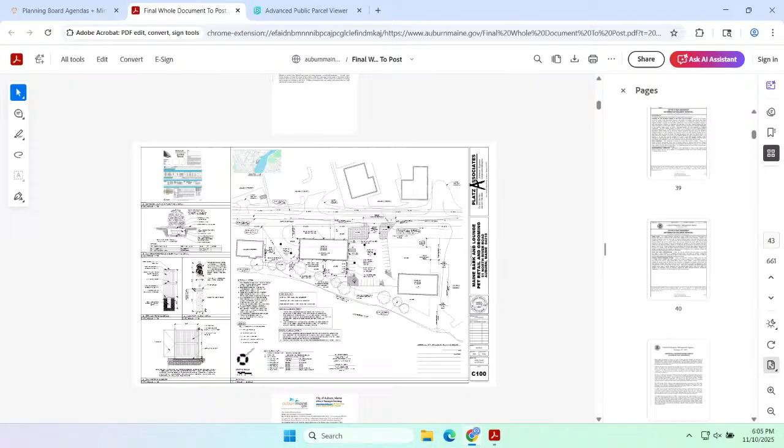That is it, other than there were some, again, staff was recommending the condition that the dog daycare portion of this is accessory to the primary grooming and retail business, with a total number of pets using the exercise areas, indoor and outdoor, at any given time not to exceed 20.

Travis Nadeau from Platz Associates, he's representing the applicant tonight, and I believe he has a few comments or questions for maybe you folks, and as well, if you can give him some input, but again, they're looking for this to be continued to the December meeting.

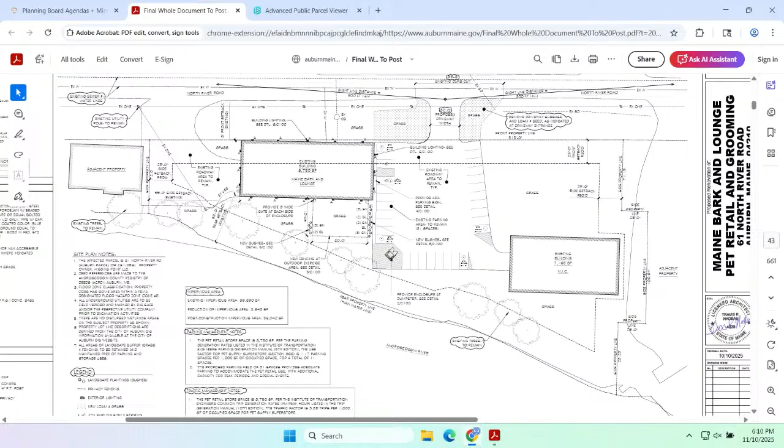Does the board have any questions for the applicant? I have questions, but I think they're more for staff. Okay, so staff, I hear we want a motion to continue, though we should probably still have a public hearing, correct? Correct. Yeah, I think so, that's what the applicant is requesting.

At this moment, I would seek a motion to open up public comment. So moved. Do you have a second? Seconded. All right, all those in favor? Excellent.

At this moment, if you would like to come forward to the podium, you can state your name, your address, and you have 5 minutes for any public comment.

All right, seeing none, I would seek a motion to close public comment. So moved. Do you have a second? Second. All right, all those in favor? Excellent, motion carries. Okay, questions for staff?

I heard no residential nearby. Can staff quantify how far this proposal is from the nearest residence? Maybe.

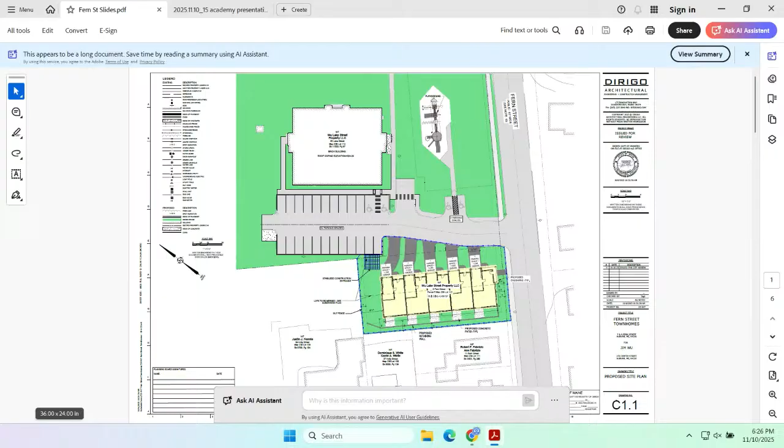This is the proposed subdivision plan at the intersection of Lake and Fern Street. The dark gray box is 7 and 9 Fern, which we're proposing to annex into the 80 Lake Street lot, to be one lot under common ownership. This also helps with sharing services, common areas for screened trash services and other things, and maintenance of the common driveway and sidewalks.

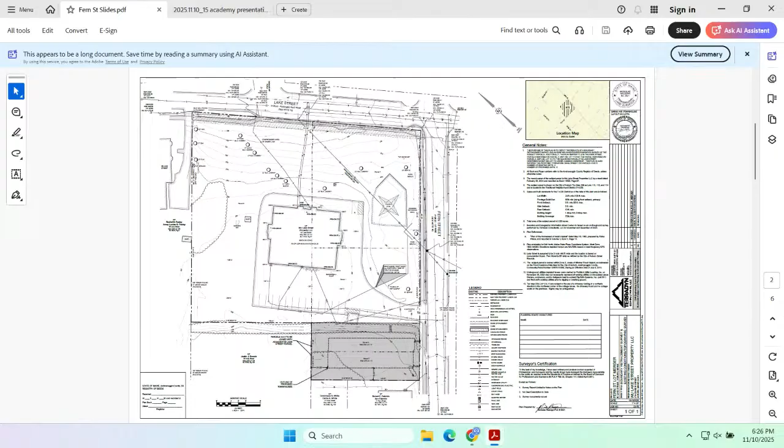For the utility plan, we collect the rainwater from the impervious area generated by the building itself, as well as most of the driveways and patio areas. That all comes to the rear of the building, farthest from Fern Street, into a focal point for filtration and stormwater quality and quantity control, at which point we propose to discharge it into the city stormwater system through Fern Street, through some new piping and structures. The utility corridor is pretty busy there through the patio area, but that's where we propose to bring in water, sewer, and electricity into the units.

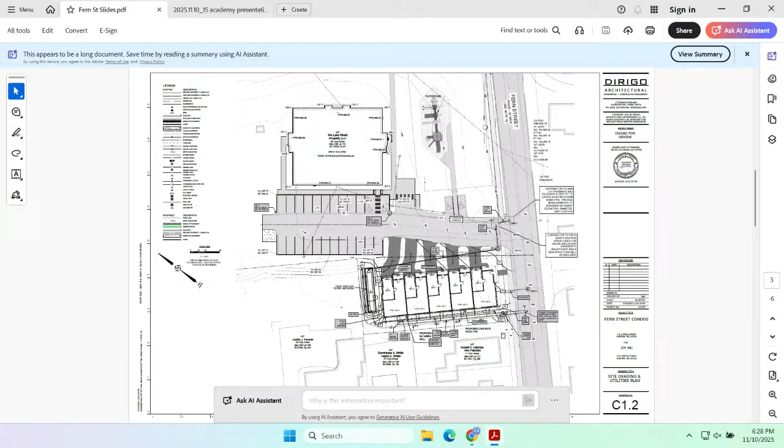These will be sprinkled units, so there'll be fire protection. Keeping the landscaping plan fairly simple, we do call for street trees to be replanted. There is one in the middle we'd really like to save if we can, though we're not sure if it's possible with the construction, but we propose to replant it.

Then just some common indigenous, low maintenance, nice looking shrubbery in different areas to maintain the buffer with our neighbors, so the development has a visual and a bit of an audible screen. Along the plan south of the building, at the bottom, that brown area, we proposed a mulched planting bed with a privacy fence atop a fairly short retaining wall that functions to help with the stormwater management.

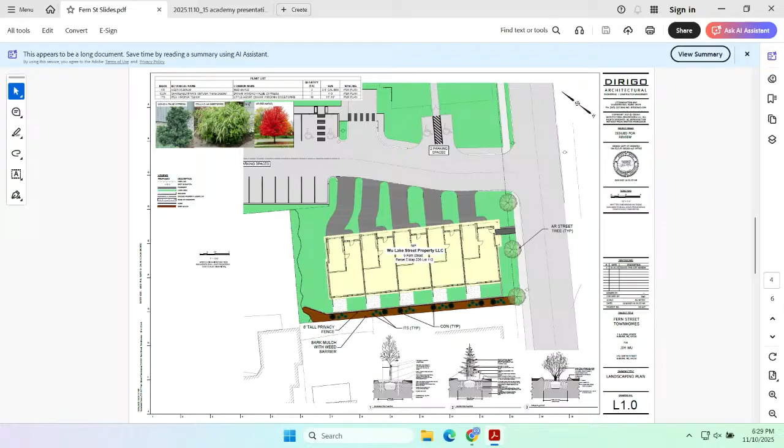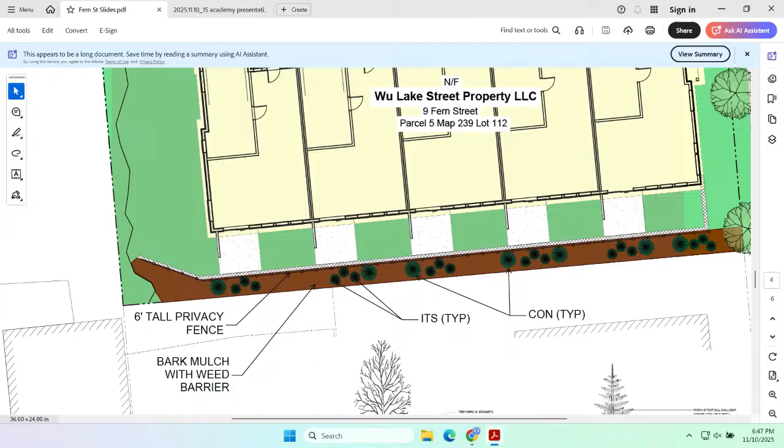I understood the Fern Street side, you actually moved the entrance right to the Fern Street side, so it looks like the front of a house, right? Yes.

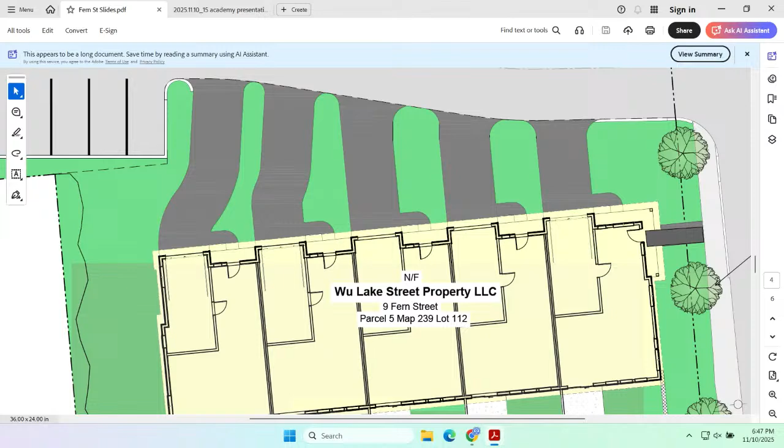There are several other, I don't know if several is the right word, but other rental properties in the area. There's not several, but there are other rented units.

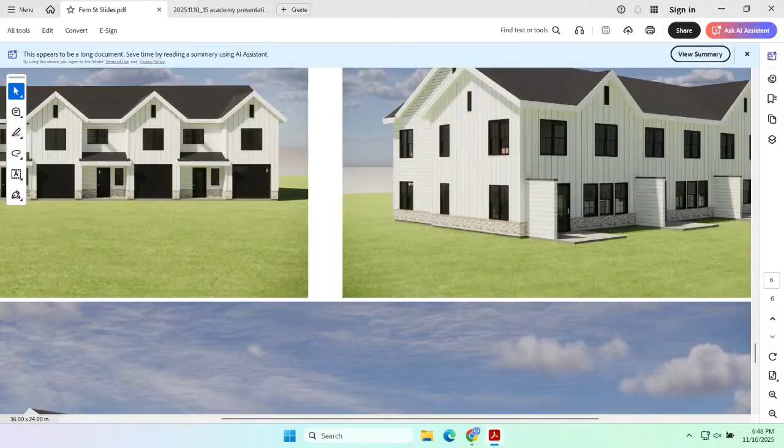And just to carry back, could we go to the rendering by chance? One more down if you would. So it's probably hard to see unless you zoom in, but because we wanted to preserve and fit into the neighborhood, there's upgraded finishes here. There's extra roof lines, there's board and batten siding with some stone trims around the bottom. So the effort here is, we could probably do the same building form square footage-wise that would meet the intents of the requirement, but that would not be nearly as architecturally appealing to look at.

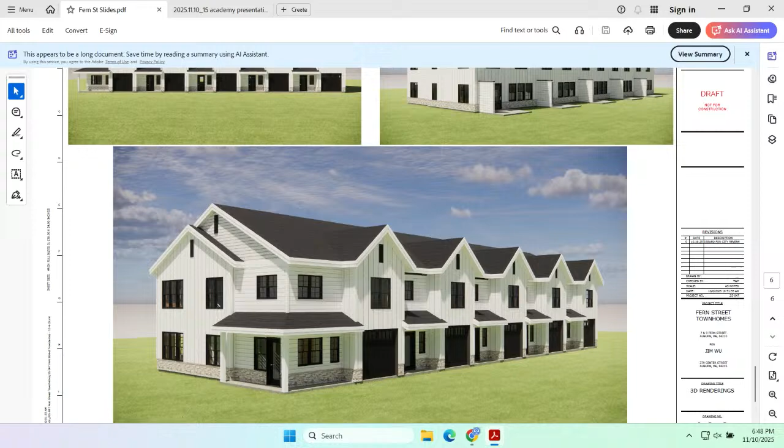The other thing I'd like to point out is we treated all 4 sides of this building, so it's not just the street frontage and then you've got the back of the house that's plain. From any angle, we strive to really make this a nice looking property an addition to the neighborhood.

David, does the ordinance require a developer in an instance like this to maintain the fence, to maintain the plantings, to replace plantings that die? And if so, is it a reasonable mechanism for the city to enforce?

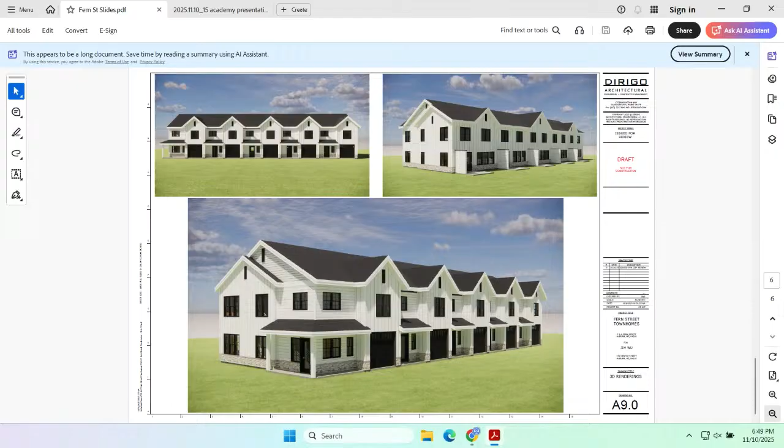If it's on an approved site plan, then they're expected to maintain and keep those improvements in place. If they are damaged, die, whatever the case is, we can take enforcement action then and say that it's no longer in compliance with what they got approved from the planning board.

You think that you can enforce that even though it's not a condition? Just simply because they show plantings on a plan, they have to do more than just plant them? I do. I think you folks are approving a specific plan that's in front of you that has a certain amount of improvements on it. No different than if this building isn't built the way it is, that's contrary to the planning board's approval. The retaining wall, the landscaping out there, they're getting approval specific from something that you guys approved. And that's all projects, not just this specific one. That's what I thought. Okay.

You're suggesting we have another proposal later this evening, and they've given us a rendering of what one of the 69 houses would look like? You're going to tell me they're all going to look like that? I think the applicant will tell you the majority out there will be designed to look like that. But to your point, Ed, they don't have to meet design requirements in that zoning district, so they could deviate if they wanted to. This district has specific form-based requirements that have to be met.

Thank you. Ed, they do address your question on page 6 of their proposal, where they will assume perpetual maintenance of private drives, utilities, landscaping, and stormwater facilities, as submitted in the draft declaration. The draft declaration was actually probably a carryover to the one that was going to be a condominium project, and it's not going to be that anymore. That doesn't matter, they're still obligated. Correct.

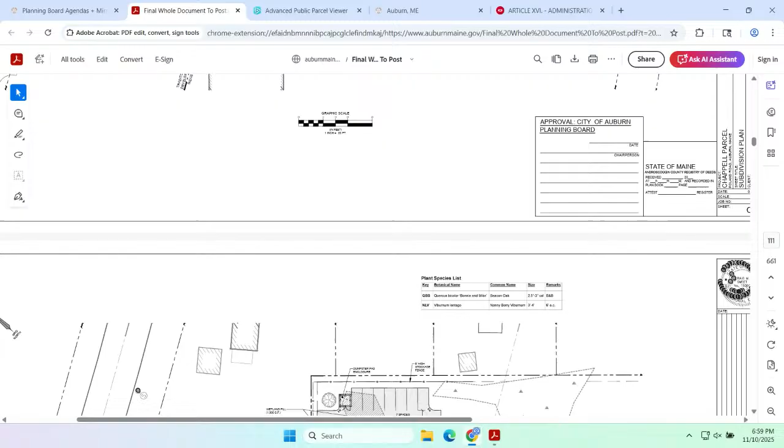Yeah. Show the. It's like 3 or 4 up. There you go.

And these were updated ones that were provided in the response to comments, kind of showing the frontage. So the stoops are going to all be facing towards the access drive to meet the intents of the T4.2 off the access drive as much as possible in that regard.

Backyard. We'll have back doors and the 6-foot fence in the back to help have some privacy from the neighbors as well. So, yeah, happy to answer any questions as well.

So regarding the drainage swales, that's a change from when we saw you the first time, correct? Because if I remember correctly, the public, overwhelming concern of the public was the pooling of snow melt and rainwater, and that will address it on your property.

Yeah, and it would address it on this property, and then if anything flows from the other properties towards the back, it'll all go that swale, and it wouldn't flow onto the parking lots from on this property as well. So it would, if anything drains off their sites, it would help drainage on their sites as well. So at the very least, your property won't affect others. Correct. At the very best, it may help others drain. Correct, yes.

Any other questions for the applicant? Are these all rental units? Yes, they're all going to be rentals. And the existing home there is currently a rental as well, which is being rented right now.

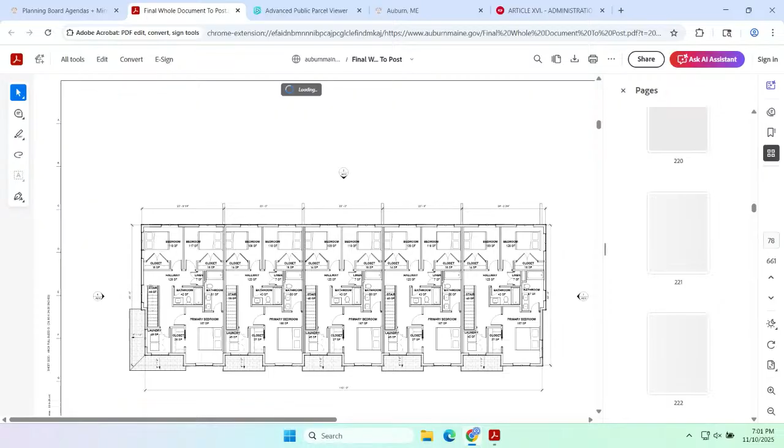Well, there's going to be sliding glass doors in the back with a little patio. It's going to be very similar to the front, just door, patio, and some windows on the second floor. But we only had the front.

All right. No, I was just looking for the, Oh, it's in the response. It's above that, yeah. I'm driving myself nuts right now. Right there. Yeah.

Can we assume that the rear is going to have the same roof line with the same pitches? Yeah.

I have another question. Is your client here? No, they're not here tonight.

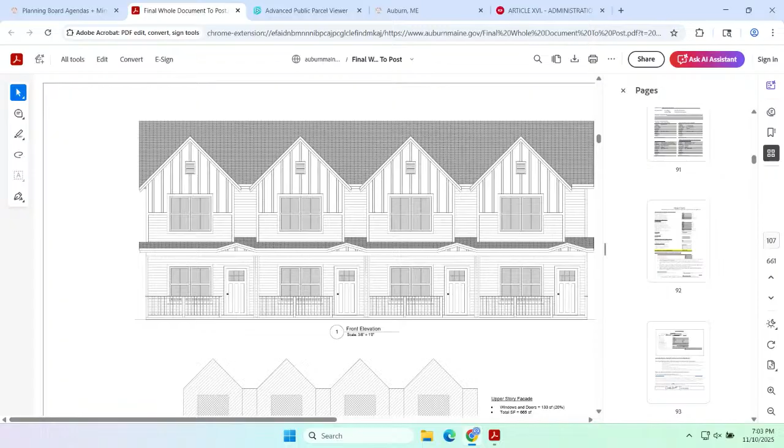So the evidence of financial capacity, which is a requirement under the subdivision ordinance, what we've been given is a letter that reads, 'This letter confirms that Jonah Chappell has a business banking relationship with Skowhegan Savings Bank that is in good standing.' That doesn't tell me anything at all. That could be $50 in a savings account. I mean, that's not evidence of financial capacity to carry out a project.

We also had from Kyle as well. I don't remember what the exact list says, but the one for Kyle says, 'This letter is provided to verify that Kyle Romick does business with Key Bank and is in good standing.' That's not evidence of financial capacity.

All right, any other questions for the applicant?

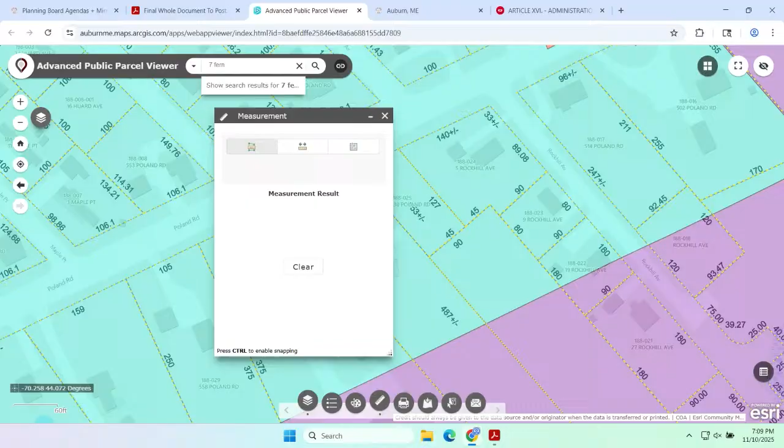You folks are at 5 Rock Hill, correct? Yeah, so let's try this. Folks need to remember the GIS is not a survey, it's the city's best guess. So based upon this, their garage may be 48 feet to the property line.

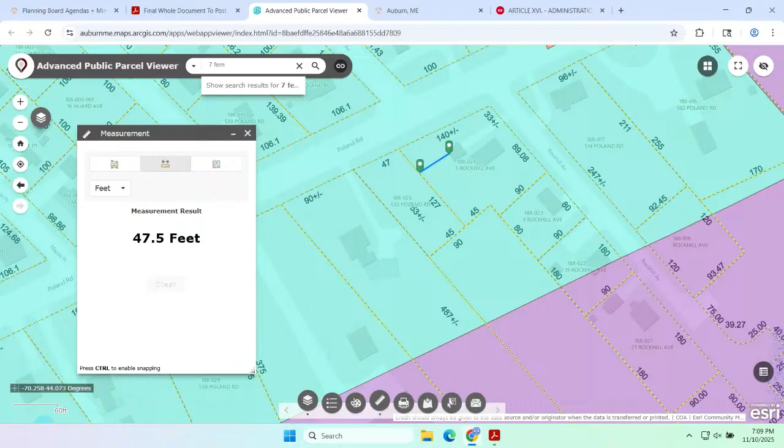And then as far as there was a question, Craig may need to speak to this more than I can, but I'll just point out on the plan here, the dashed line up there. I don't know if this works or not. That's a 5 foot setback. So if that's 5 feet, I'm guessing, I'm not sure, Craig.

Hey David, which side of the building is considered the front? For purposes of the Auburn Code, you can measure your setback off of where the shared access is. So this is the front, this is the front. We have a building. So the rear setback is a minimum of 10, and you said it was more than that, right?

Yes, but that's not a rear setback that I just pointed out. This is a side property line. So even though this is the front, not even sure. I would argue probably the rear is probably that way, all the way along the railroad tracks. I'm not sure if we have an image of that or not. And then the sides are only 5 feet setbacks, so whatever you want to call the side or the rear, by ordinance requirements. Thank you, Paul.

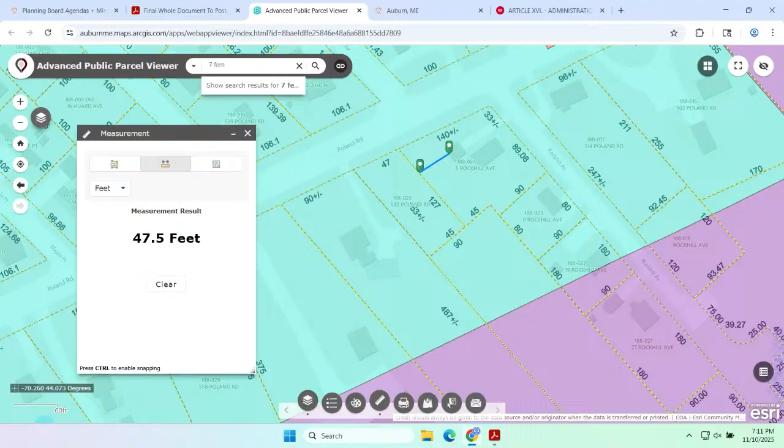I have, may I follow? So a couple of questions about the frontage of the lot proposed to be developed. You just had up the city's GIS, and I couldn't read it carefully, but it looked like it said 47 feet or so of frontage. It's both this lot and the lot next door. This is, you guys can't see that, can you? So a total of about 94 feet of frontage, not 5 feet.

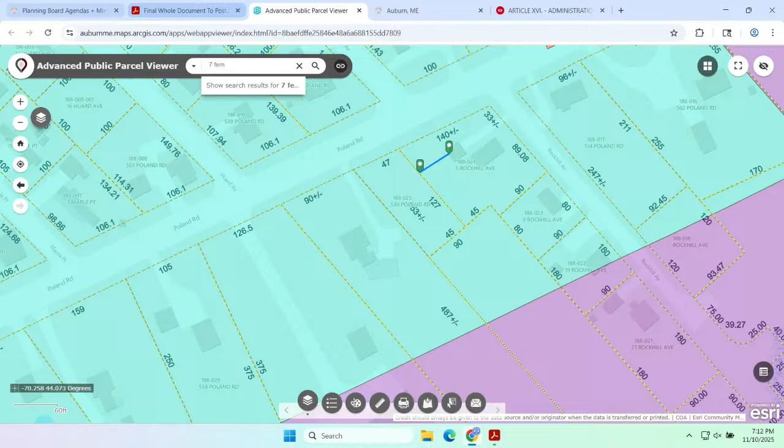Oh, I'm sorry, I can't see. Like 127 off that, I don't know the exact. Oh, okay. Why did you locate the dumpsters? And is there any other spot where they might be away from the abutter's home?

They're there because when you have the L-shaped parking lot, that becomes a dead zone, and it's straight back for where any truck would come in and out. And then the other side, the parking lot is much closer to the southerly property line, and there's swales we have running along the whole edge to collect the storm water. So that zone became, in terms of site navigation and the layout of this site internally, the optimal spot. And it has the full enclosure, and then there's an 8-foot fence around it, and we even put a tree next to it to try and shield it a little bit additional from the neighbor on that side.

So it's got fencing immediately around it, and then a standard tree and an 8-foot fence behind it, I believe it's 7 foot around the dumpster, but I'd have to confirm, it's 6 or 7 foot around the dumpster, the standard, and then 8-foot fence around the property line, and then a tree adjacent to it. Like chain link with vinyl slats kind of thing? I think it's wood, but I don't remember off the top of my head, it's going to be a privacy fence for both of them.

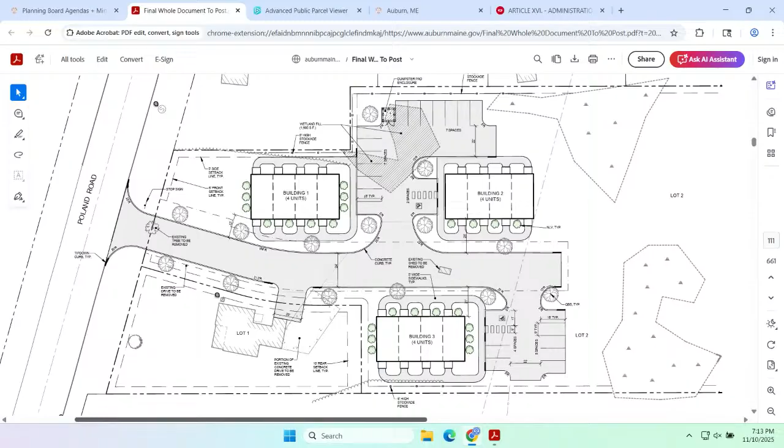Where do you intend to store snow on the property? So snow can be pushed straight back on the road because the swale kind of starts. The snow can be stored along, straight back, and if it's in the swale, or right in front of the swale - you don't want it in the swale, but it'll help drain back that way - and then the whole site's gonna be pitched towards that swale. So at the end of the parking lot there, and then adjacent to building 2 would be a good spot next to the swale, so as it drains, it just goes right into the swale.

And then the access drive will be curbed all the way back, so you can't just come in, you wouldn't want to trip up your curbs, so they're going to want to push it towards the end where it's not curbed. Maybe explain to me again, I'm looking at the swales, but the dumpster, why is it not all the way back, almost right towards the swale where the truck could come straight in? Still have room to, I'm not sure I'm following the question. Are you talking about right here? Nope, come straight in the drive itself, straight towards the two swales coming together. Oh, at the end of the access drive? Yep.

All right, any other questions, comments? Question. Are the plans for the swale in the plans that you provided with us?

They're just detailed on the grading plan there. So those would be the contours of the swale. It's a 1.5 to 2 foot deep swale. Some areas as it gets towards the back, it gets about 3 feet deep, 2.5 as it gets towards the back, and the grades change a little bit because you have to get down to the lower half where I think it's a 5 foot drop from there to the level spreader.

Going back to the original plan that came to the planning department first, and then you had some thoughts of changing the plan. You requested more time to work with it. I guess as I look at it, was it just an economic issue, you needed more units to make the project viable?

No, they just decided to move away from the lots aspect of it, and felt that this would be a good add into the site in the area. Since it's tucked back off of Poland Road, it would be kind of its own little community there. But trying to get that third building in, it's made it more crowded. If I remember correctly, the building location in the front there is very similar to the property lines as it was before.

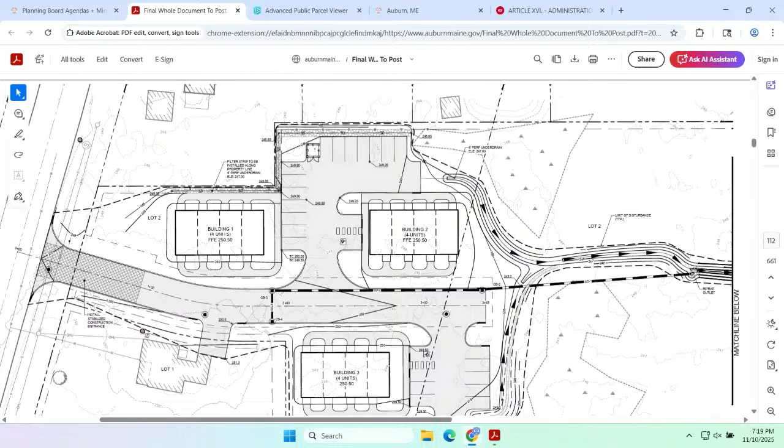All right, any other questions, comments? Seeing none, I would entertain a motion. I need to be aware of how I word this. I make a motion that the proposal does not meet our requirements, citing page 4 of our development review checklist, specifically technical and financial capacity. I'm not convinced, given the letters of information from KeyBank and Skowhegan Savings, that the applicants have the financial ability, as these letters are written, to carry through the project.

Do I have a second? Second. All right, do you have any discussion of the motion? If the board's interested, I would maybe look towards the applicant here, versus denying it. I'm wondering if there's a condition and/or you continue it to give the applicant the opportunity to come back with sufficient evidence of financial capacity.

That seems more reasonable than not approving it. If they're able to do that, and not approving it, they would have to actually resubmit the whole application and go through the whole process again. I'll amend my motion to include that it be postponed until they can provide adequate financial information.

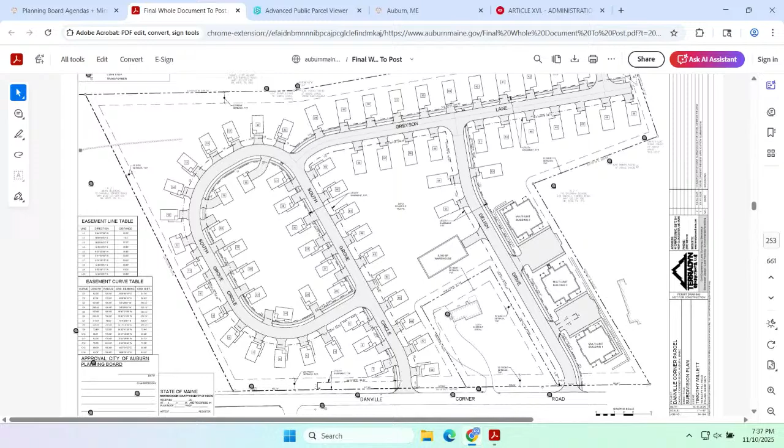Let me ask about the plan C2.1, grading and drainage. So with respect to that particular plan, I'm having a little trouble looking at Unit 14. It looks like - are you planning to add a lot of fill in those areas where the building site seems to straddle or go deeply into what appears to be a pretty steep ravine? There'll be a little bit of fill on 14, and along the curve, yes.

It'll take me a while. I have a question in the meantime. I'm looking at the land lease, section 15, termination of lease. It seems to give the landlord pretty broad termination rights. These are stick-built homes that are being purchased, and the landlord terminates for failure to pay ground rent - what is the homeowner supposed to do with their stick-built house that is no longer allowed to occupy the land? I will have to mark that down and have the attorney answer that one for you.

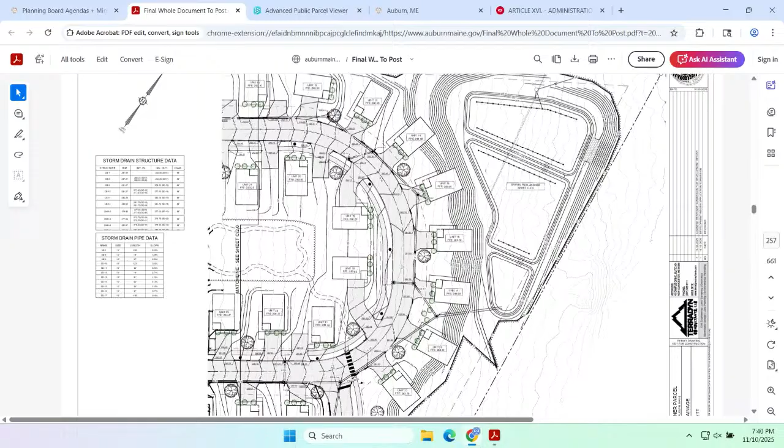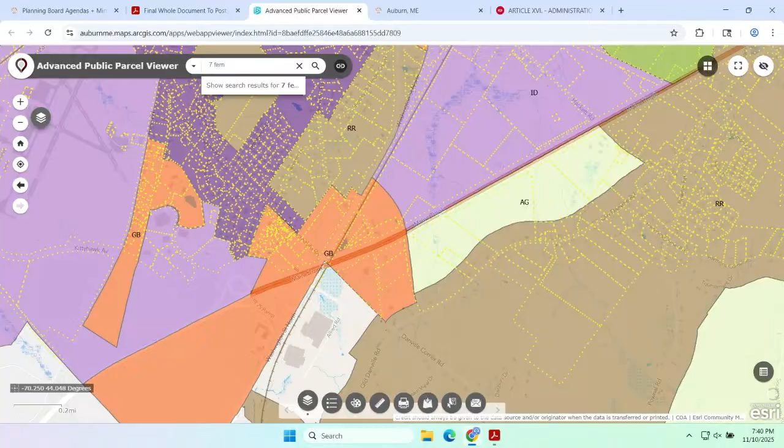I guess it would be helpful for me to see an aerial view of this parcel, at least of the two parcels, in relation to Washington Street and to the lighting project that's a state project upcoming next year. To which project, Bob, are you talking about next year? This is just above the blinking lights now. Oh, you're talking about the traffic signal? Okay, yeah, sorry.

Washington Street's where? Okay, where's the light? So how much - what's the footage? What's the distance between that light and the three driveways? I don't know that distance off the top of my head.

Close to half a mile. A little less.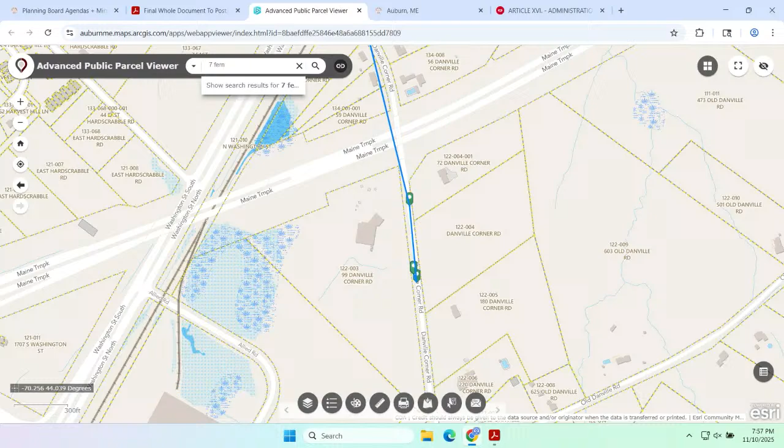So with traffic concerns, of course, if you're going into Auburn, going straight to Washington Street makes the most sense. Is there another way out that people would reasonably use?

It's probably a better question for some of the folks in the audience. I have a pretty good idea, but especially if you're going to Portland, making a left turn is difficult, so you might go the back way to come out in front of the Mobil gas station further down, but most people won't do that.

And I guess what I would say, and not to cut you off Paul, but I know that part of staff's recommendation is a traffic impact analysis. So I think we could sit here and surmise potentially from our own anecdotal experiences, but I would rather prefer to have an expert weigh in on it.

Sorry. I guess as a quick reaction, maybe a knee-jerk reaction, if we are to look at the site plan review under section 60-1277 and section 60-1359, even to accept this as the preliminary review, personally I can't find that this application meets the requirements of those 2 sections.

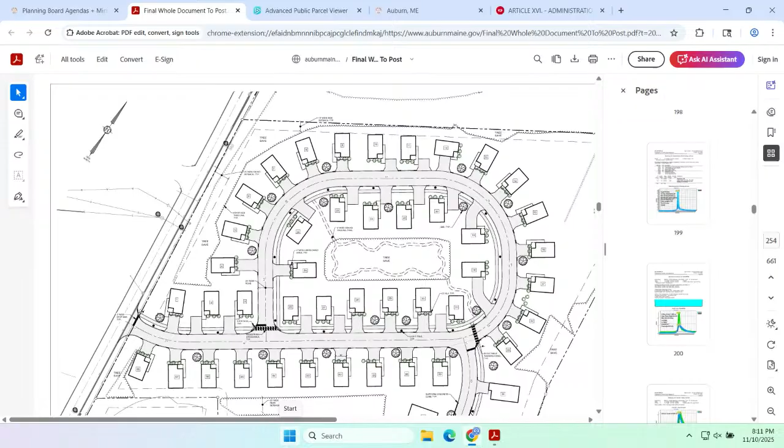May I ask a question of staff, a procedural question? The suggestion in the staff memo is that we would grant preliminary approval and then have another hearing, the question being whether it would be a public hearing for final or review, but there's nothing that would prevent us from continuing this preliminary review. Not at all, not at all.

Would you feel comfortable continuing this preliminary review after you received a traffic study? Okay, that's reasonable.

So what I'm hearing, kind of formulating as a motion, is continuing with a traffic study. We're going to have the attorney here next time as well. He wasn't able to come for health reasons but he'll be here next time. So front and center is that agreement - I'll relay all the questions you guys had back to the applicant for that. Maybe providing another draft that reads a little bit better would be helpful. I'll try and get that from them.

I already talked with the city engineer about the traffic study, so we're already working on that. Do you have a question, Bob? I guess I'd just add to the traffic study, to be sure we have some communication with the state in writing, that they recognize this project and it should be reviewed along with all the other comments that have come in within the deadline, but to make sure we get some communication back directly from the state with respect to the traffic situation at that particular intersection.

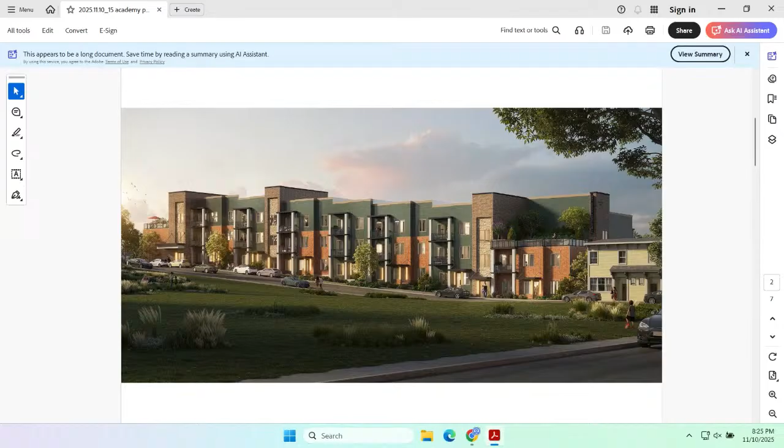Just going to give you a brief presentation on the 53-unit market rate apartment building proposed at 15 Academy Street. David did a good job of just kind of covering broad strokes the site scope and a number of items that we've been coordinating with staff on.

Just wanted to note, really appreciated the coordination with staff. As was noted in the planner's memo, we had, I think, 4 waivers in our original application. Gotten that now down to 1 with just a few tweaks to the site, so certainly helpful in that respect.

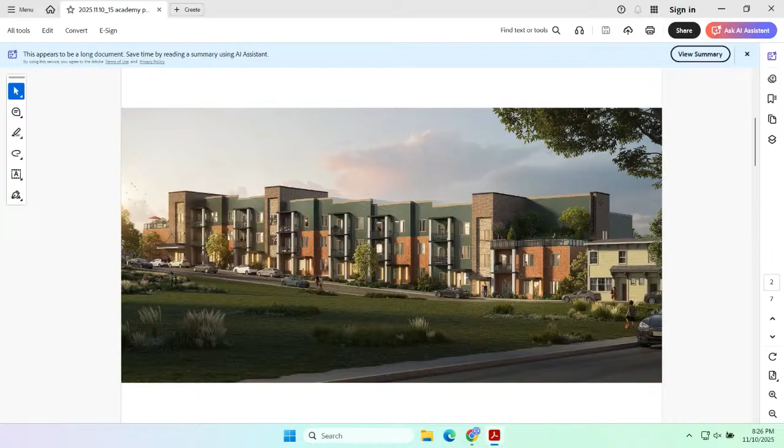On the first slide that you'll see here is a view of the apartment building looking northwest, and in this view you would actually be standing on Main Street. In the next slide I'll show you just for orientation again, if you don't mind, David.

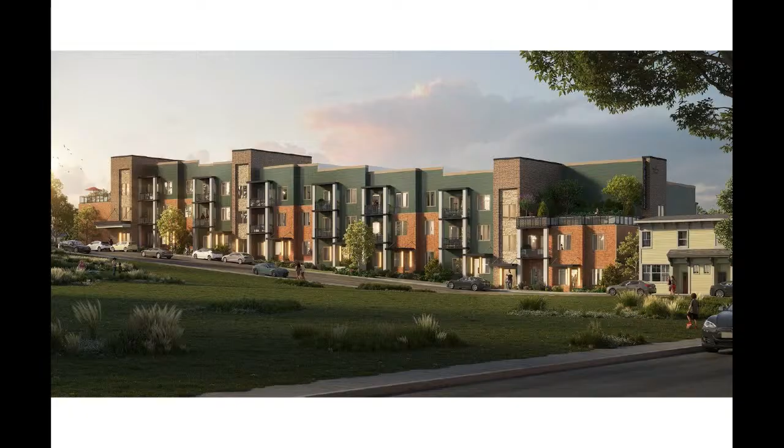So, if you go back to that rendering. I just wanted to touch on this, and we can bring it back up when we get into discussion, but I'll preface it with there's certainly been a lot of time gone into this project here. A lot of thought gone into it. The applicant team here, we're certainly really excited about this project and to get some feedback from you folks this evening.

But going into the form-based code items here, we're certainly trying to build on the street wall presence here. You can actually see on the very right-hand side that shows the existing townhouses that start at the intersection of Main Street and Academy Street. So really trying to pick up where they left off and bring that street wall up Academy Street here.

We think it's a great location with the park across the street, CLT across the street, in this downtown urban environment. So a lot of access to local businesses there as well. Great access back to the adjacent infrastructure for roadways, everything like that.

There's certainly a lot of grade across this site, as you'll kind of see on my not so descriptive black and white plans, but this rendering really does it justice. As was noted, there's 8 steps in the building right now.

So I think what goes into and becomes kind of a complexity with our design actually became one of the most unique features of the design. So I think this is a really good looking building in that respect.

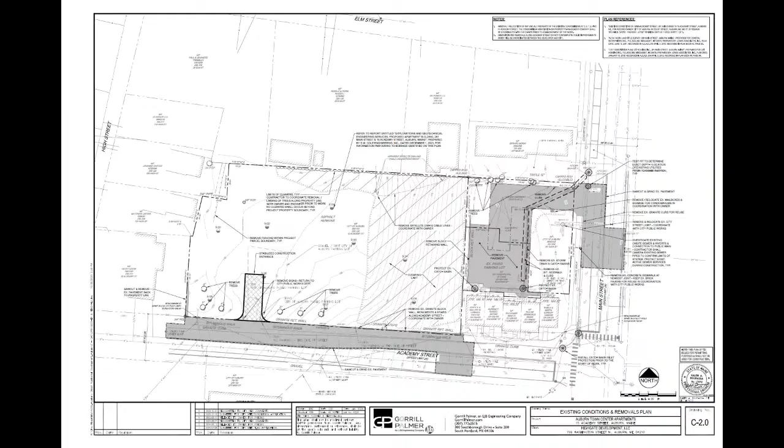These two lots are historically developed, currently vacant, we'll call them. The Main Street parcel is actually the primary access for the existing condominiums, so that's a paved curb cut with some utilities running through it as well. The upper area is more or less a gravel lot at this point. I understand that the CLT, when they have events, we allow them access to park there now.

So if you go to the next slide.

We have individual ground floor access with stoops, going along with the form-based code as well. Additionally, on the back side, there are stoops to those ground level units. There are internal stair towers for other folks that live on the upper levels to access as well.

Sidewalks going around the building, connecting to the Academy Street frontage, and additionally to Main Street. So we like that we're generally on the corner of Main Street and Academy Street, very close to downtown. You have the parks, the river close by. A lot of access for tenants to get in and out via foot traffic as well. So we think it'd be a great addition in that respect.

As I mentioned before, generally the same location for the curb cut on Main Street, actually slightly shifted south here, but we're setting up a lower parking area which includes the spaces that would be relocated or reestablished for the existing condominiums. Of course, we're maintaining utilities for those folks, and currently working with them and CMP to relocate their existing electrical services underground, to try and get rid of the overhead wires along Academy Street, or at least along our frontage.

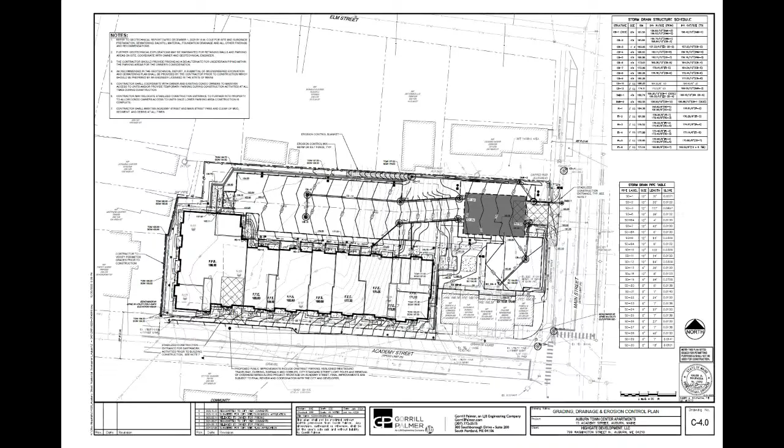I don't think I had any additional slides, I just wanted to touch on a couple other items. I know David had forwarded a comment from the abutter, I believe it's Plan West, the direct abutter there. As mentioned, we have a fence, called out as a 6-foot white PVC fence there. I wish I had included it, we might be able to pull it up with our packet. We have 3 lilac trees along that edge of the property to help with views and buffering for the folks next door. There's additional landscaping throughout the site, so if other folks have comments, we could pull up that plan and point it out.

Just on the parking item, that was something we had talked about previously with David. We're providing 58 spaces on site, which essentially meets the requirement for the actual tenant spaces. I wanted to make the distinction that although 73 spaces are technically required, the difference is really in what's required by code for guest spaces. We're certainly motivated, and the applicant has already started reaching out to CLT and a couple other local off-street sites for parking. We'll hopefully have more feedback for you on how those discussions are going and whether those can be secured.

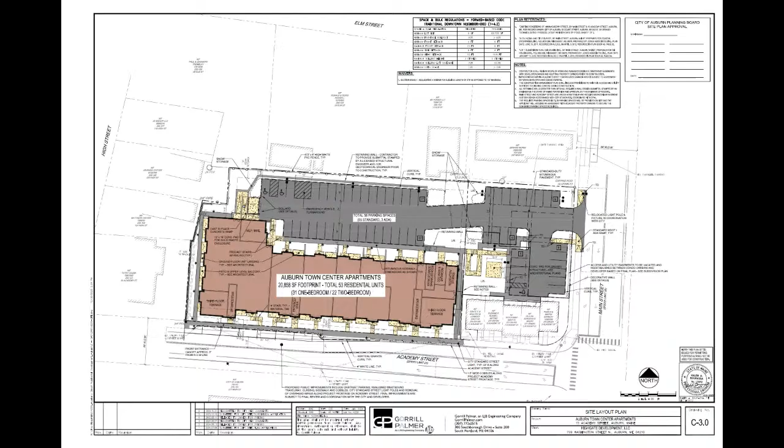I have two questions. Can we see a visual, or can you tell me how far you are from the parking lot and parking garage here on Main Street?

I wish we were closer.

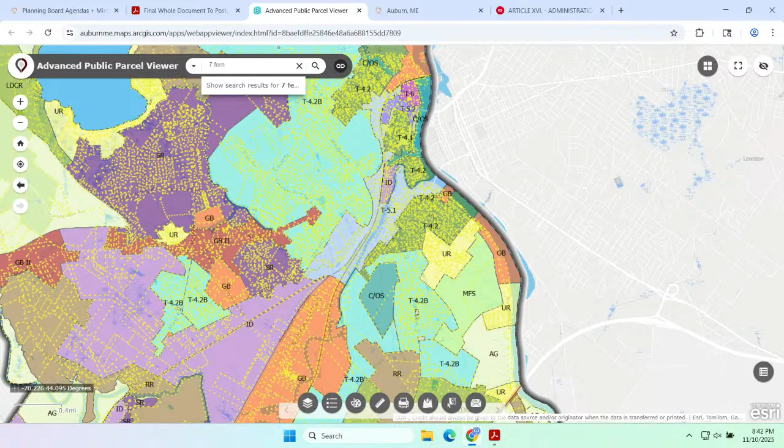Yeah, I believe what we found for the standard was that we would be looking to count anything within 1,000 feet, and we had looked at this with David—I think we're at 1,100 feet technically, so we're close, just not quite there.

That's measured from your building? From the building, correct. To what point on this property? I think it was to the parking garage we were measuring that.

I'm not sure that matters. Well, already I'm at—1,200, right? So not to the parking garage, sorry—you get to the parking lot? Right, yeah, not the garage, the lot. This is the lot up here, like the surface lot. Okay, so if I get to the garage, I mean, now I'm cutting across the parking lot. Point being, it's over.

And we can't measure from the condominiums that are somehow being incorporated into this project rather than from the new building that's being constructed? Those are separate projects, separate owner.

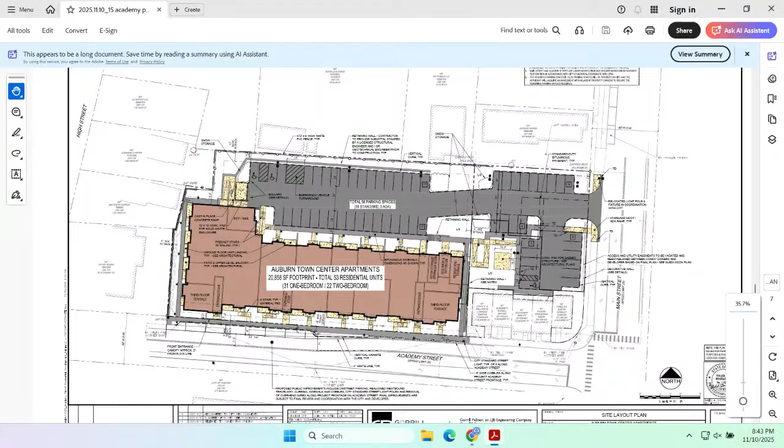Aren't they doing something in coordination with them regarding access, a shared access way, or parking and things of that nature? Do you want to speak to that? Yeah, I think we're certainly reestablishing the parking, but we're not introducing these as new units. The construction of those structures—obviously they're existing structures—is just not part of the application.

We really did look at it every which way and tried to get as close as we could, but I just couldn't quite get there. Well, what if this board were to say that's close enough?

Accounting—I don't know why that existing building, if its amenities like its parking are being incorporated into yours, and they are, right? Not sure. Then why can't that be considered the principal building? And if you did, would that knock off enough footage?

Can we do that, actually? I mean, it feels a little stretchy. Yeah, I think we're on the edge. Certainly we have, the applicant has coordinated with those adjacent condominium owners to establish agreements or easements for the restructuring of their area, but nothing associated with the units too.

I think it's certainly close, but I wonder, David, if there's some way that if the board was amenable to it, we might formally note the distance from our proposed structure to the garage, and if the board was amenable to that, maybe voting that might be acceptable too for use.

There's been some discussion in the application that you could use general street parking that the city has around the block. I would strongly suggest that that not be considered as part of the parking. Somebody might incidentally do it, but that is a very dense area with many multi-story buildings, with many apartments. There's also the community little theater there and the Foss Mansion that the Women's Literary Union runs. They have many activities. The limited parking on the street is really premium. So that really should be available for the general public.

And when the city has events, like the Balloon Festival, the Lobster Festival, they block off the street and there's parking all over the neighborhood. So that should really remain as public parking, in no way dedicated to this project whatsoever.

I'd also like to talk about the sight distance from the entrance. It speaks to it in the application. When you're coming out of that lot, if there's a vehicle parked on the left-hand side, it obstructs the view, and therefore you don't meet the minimum requirement to be able to have sight distance. That's a busy road right there on Main Street, cars coming and going. You really have to consider whether you can allow parking on those corners of that ingress and egress to make sure you have the proper sight distances.

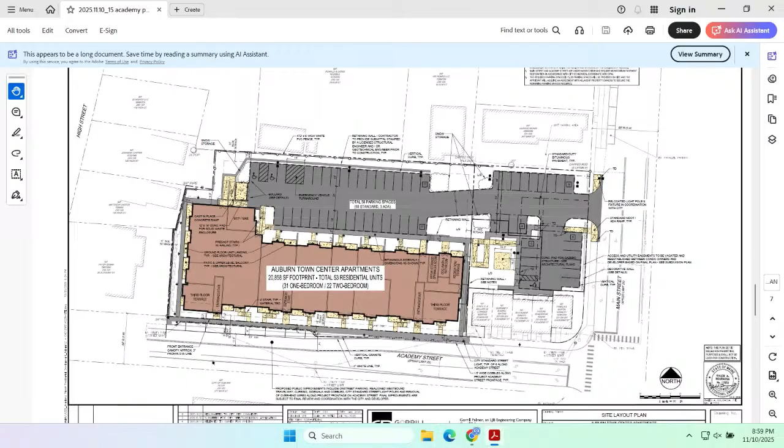Also consider, if you're going north on Main Street toward downtown and want to turn into that space, you'll have to stop in the travel lane and put your blinker on and wait until the cars going south clear out. What's that going to mean for the traffic that travels down that way while they queue up behind these waiting, turning cars?

I think that needs to be considered, or you're going to have real traffic backups at those intersections going forward. Finally, I really think you ought to look at the snow removal. As I took a look at the plan, there were only 3 locations identified as storage areas for snow - 2 on the lower level, only 1 on the upper level. Can't tell from the drawings if they're adequate, but given the size of the 58-car lot, during the winter you're going to pile up a lot of snow, and it needs to be cleared because you need all 58 parking places. You can't pile snow up in your parking lot to do this. I'm also not clear whether the storage areas are also used for any landscaping along the building or other amenities - you certainly don't want to be piling snow on top of your amenities.

Plus, the driveway that goes up that steep slope from Main Street - that slope is 6 to 12% grade. That's going to be really important in the wintertime to keep clear so vehicles can go up there safely. Just a note, public roads cannot be more than 8% grade. So this is a pretty steep grade getting up into that lot, and it needs to be properly maintained constantly throughout the winter.